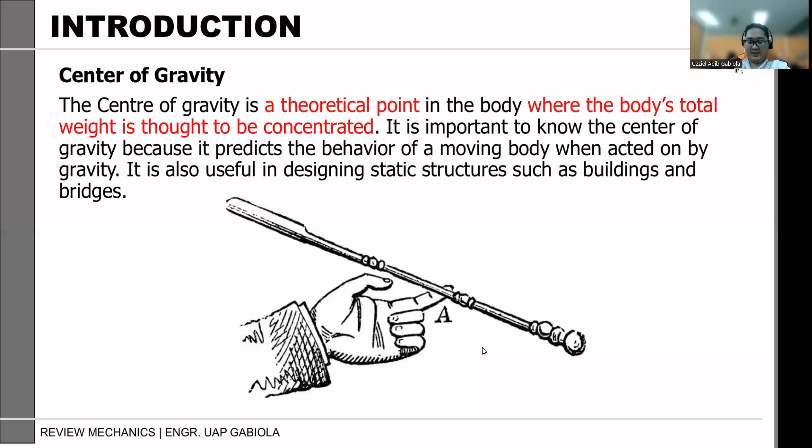Okay? For centroid of a composite area, if the plate is homogeneous and of uniform thickness, the centroid coincides with the center of gravity, ito yung sinasabi ko kanina. Kaya dito, para makuha yung bar x and bar y, pwedeng gamitin natin yung formula kanina. Balikan natin 'to. Ito yung sa first moment of area. Mapapansin ninyo equal siya sa integration of x dA. Saan ba natin nakita yan kanina? Nakita natin yan sa centroid.

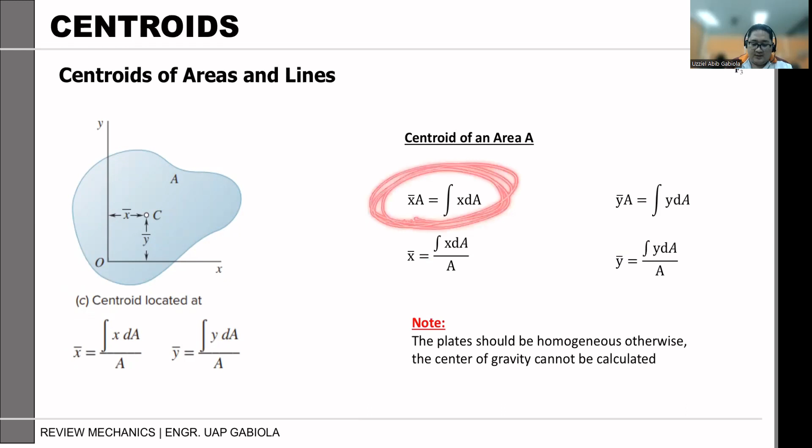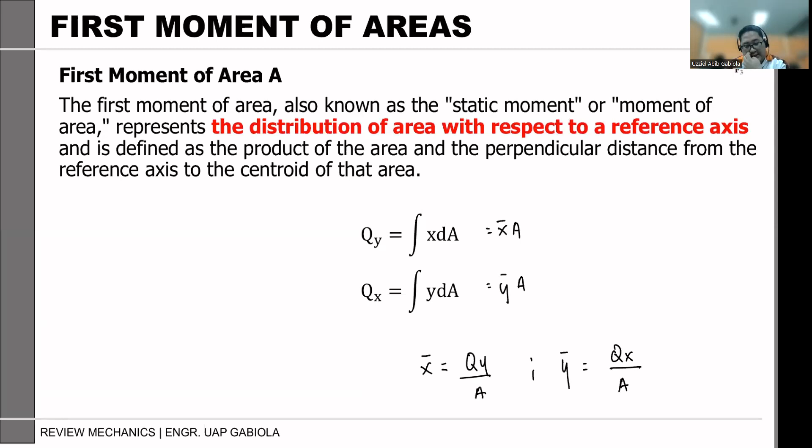Okay. So, pwede natin i-equate sa bar X A. And then ito ay equal sa bar Y A. So, kung gusto natin makuha yung bar X, pwede natin gamitin yung first moment. So, bar X is Q_Y over yung area natin, and bar Y is equal sa Q_X over yung total area natin. Kaya papasok dito yung derivation na nandito sa composite shape natin. Dito nanggaling yun.

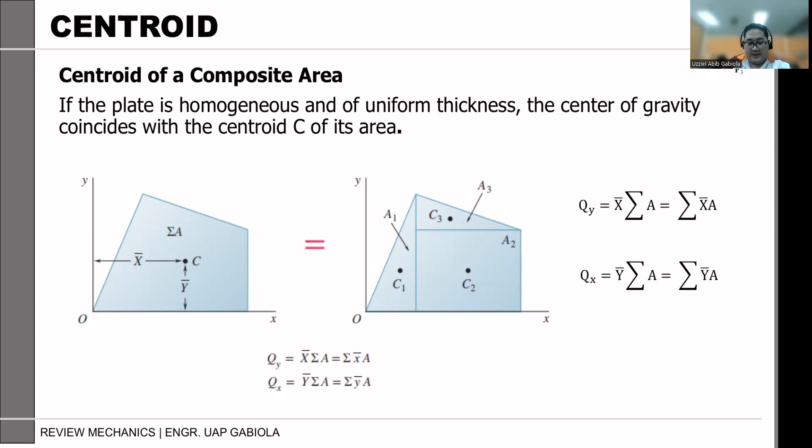Para makuha yung bar X, yung Q_Y i-divide lang natin sa summation ng area o yung total area natin, okay? Or dito, yung Q_X divide natin sa total area para makuha natin yung bar Y. Okay? Yan, sige. I think we can start with an example. Okay, so let's have an example.

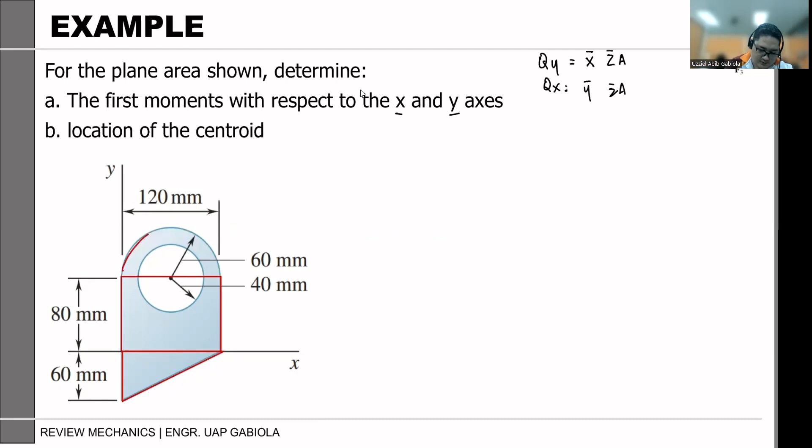And then circle, ma-minus tayo ng circle, ano? Kasi ito ay may butas siya, so kailangan i-minus natin 'tong shape na 'to, okey? So meron tayong ilan yun, 1, 2, 3, 4. 4 segments or 4 shapes na kailangang consider.

So ang gagawin natin, puwedeng i-tabulate na lang natin yung solution nito. Puwedeng halimbawa, start tayo dun sa triangle natin, okey, and then meron tayo nung rectangle, meron tayo nung semicircle, and then circle, okey? So since magka-calculate din naman tayo, i-table na natin ano.

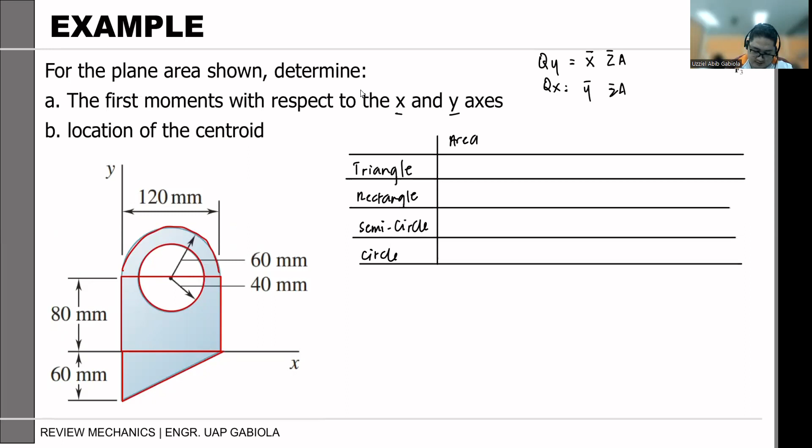Okey, so siguro ang kunin nating kasunod is yung area. Ano yung area ngayon nung mga shapes natin? So yung first one, yung area ng triangle, that is how much? 1/2, 120 times 60, base times height, so 120 times 60, correct?

Okay, next, yung rectangle, that is 80 times 120 minus - yung rectangle lang muna, mamaya na mag-minus, no? Kasi meron tayong area for circle, ano? So yung sa circle, doon na lang natin i-minus. Okay? So 80 times 120. And then, semicircle.

So area ng circle is pi r squared. So pag semicircle, kalahati nun, ano? So that is 1/2 pi. R natin will be - anong R? 60, ano? Okay, 60 squared. And then circle natin will be pi r natin ay

40 po, 40, okay? Pero we have to note na ito dapat ay negative kasi ima-minus natin siya dun sa total ng ating area, no. So puwedeng gawin natin i-total na natin 'to para meron tayo dito sa baba.

Ilan yung magiging total niyan? So pa-try natin sa calcu: 0.5(120 times 60) plus 80 times 120 plus 1/2 pi(60 squared) minus pi(40 squared). Okay, so ang total area is

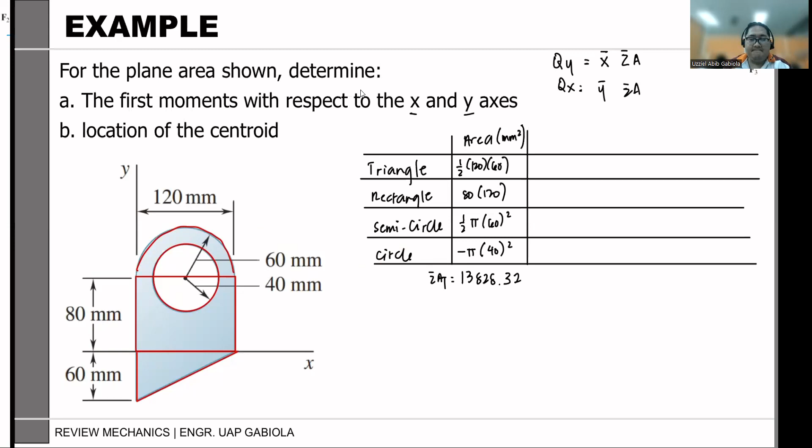Okay, next. So kailangan natin is use distance nung lahat ng shape natin with respect dun sa reference axis natin. So ang reference axis natin dito is itong y tsaka itong x axis natin. Ibig sabihin, kukunin natin yung centroid ng kada shape, halimbawa si triangle, si rectangle, si semicircle, and then kung ano yung mga distances ng mga centroid nila dun sa reference axis natin. So yun yung ibig sabihin ng bar x and bar y, no, kapag kinukuha natin dun sa para sa first moment of area, okay?

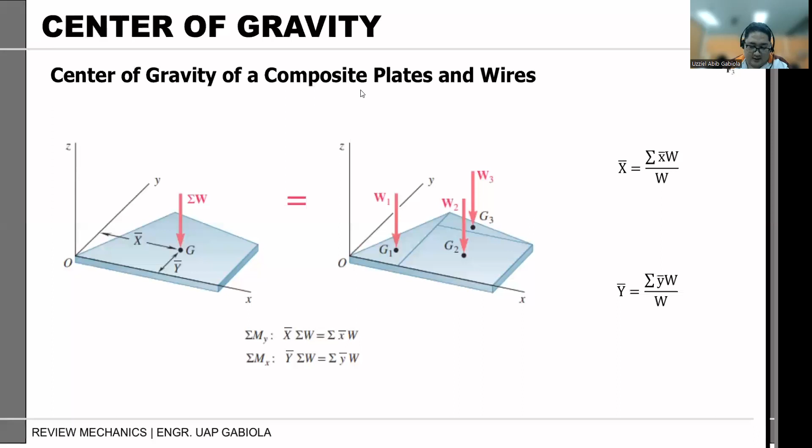So ano yung magiging bar x at bar y ni triangle muna? So si triangle, so tingnan natin sige yung table ano. Si triangle, okey, ito, okey. So ang value ng centroid ni triangle is h/3 for y ano. So since yung ating triangle is a right triangle, it is the same dapat nung bar x natin, h over 3 din.

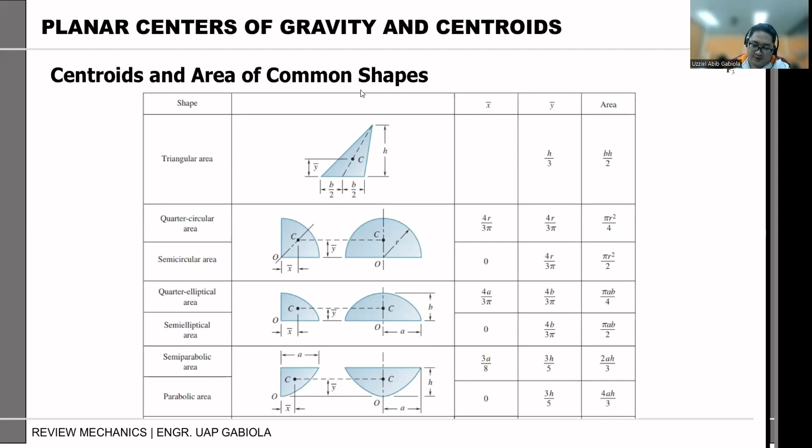Ito kasi naka-scalene siya, no? So kaya ganito yung nakalagay sa kanya, no? Wala siyang bar x. Pero kapag right triangle, b over 3 din yung bar x natin at bar y natin. Okay? So ibig sabihin kailangan natin nung 1/3 nung distances natin.

So ano ngayon yung magiging bar x natin? So ito yung CG niya. Ang bar x niya is yung distance niya papunta sa y. Yun yung bar x. Ito yung bar y niya. Okay? So ilan yung bar x? 1/3 of 120. 1/3 of 120. Okay, correct. So that is equals to 40. Okay?

Next, yung rectangle. Yung bar y, sige, yung bar y na muna. Bar y will be 1/3 of 60, 20. 60, 60 lang or negative 60. So kapag dito sa bar x at bar y, important yung signing natin, ano?

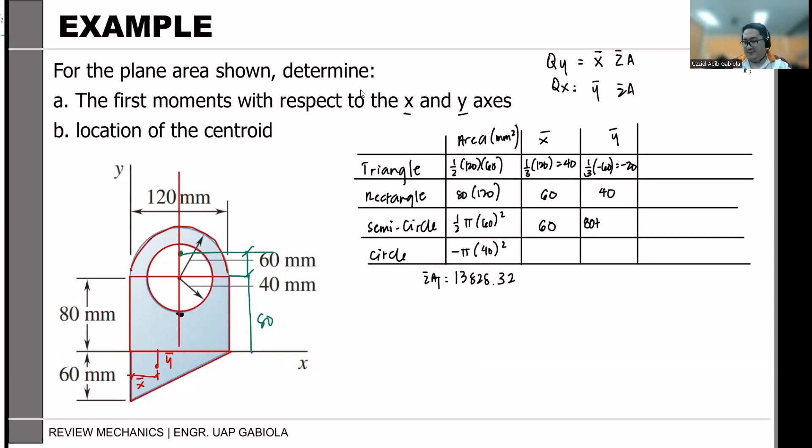Dito yon, somewhere dito, so titingnan natin ngayon. Kasi ang magiging distance natin is this distance. Ito yon, yung kanyang centroid. Tapos yung distance na to, which is 80. So dapat ang ano natin kay semicircle, kapag bar y is 80, plus kung ano man yung distance na yon. Pero yung kanyang bar x is 60 also. Katapat lang nung ating dito, no? Katapat lang siya. Okay?

So punta tayo doon sa semicircle natin. Itong isang to is para sa arc, ano? Don't be confused, ito ay para sa arc. Ang kailangan natin ay sa shape or area. So ito yung kailangan natin, ano? Semicircular area, so ito yon. So yung kanyang distance from the bottom nito, papunta doon, pag makikita nyo dito, that is 4r over 3 pi. Okay? O semicircle ito pala. 4r over 3 pi. Okay?

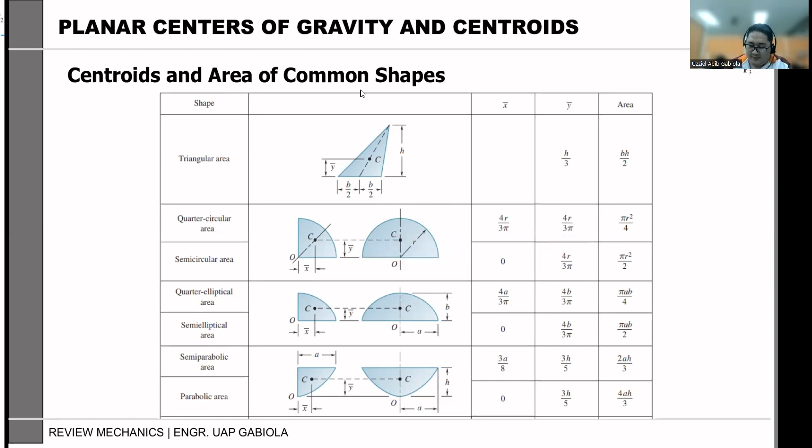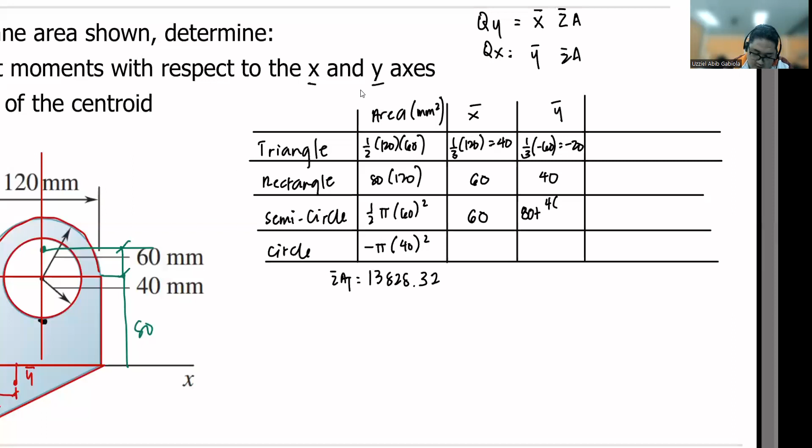So balik tayo dito sa table. 4r over 3 pi, so lalagay mo lang yun dito. That is 4 times yung radius ng semicircle natin, which is 60 over 3 pi. Okay? And then for our circle, ano ang centroid ng circle natin? What will be the bar x ng circle?

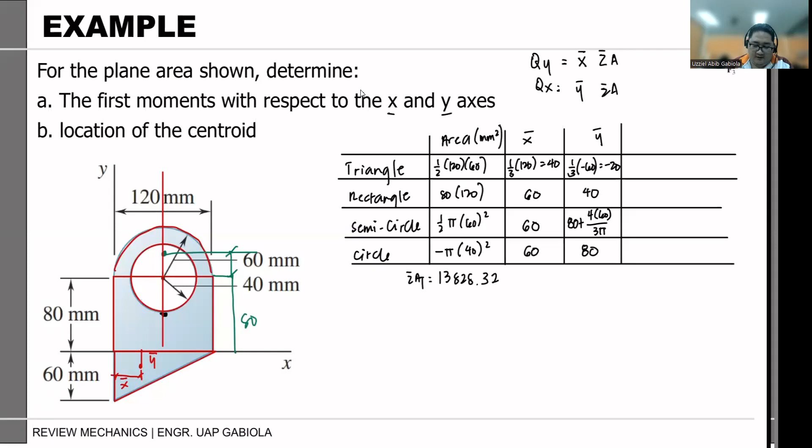Itong point na to, ibig sabihin. Anong coordinates itong point na to? Ang bar x niya, correct, 60 din. And then, ang kanyang bar y ay 80, yes correct. Okay, so yan yung bar x and bar y natin. Kasunod, after identifying yung mga values na yan, pwede na natin kunin yung next set ng table natin.

Which is yung bar x times a. Ito na yun. Bar x times a, so ito multiply mo lang, tapos yung ating bar y times a. Tapos, isasum lang natin. So sige, i-calculate ko na lang, pa-verify na lang ako sa value.

1/2, 120 times 60 times 40, this is 144 times 10 to the 3. 80 times 120 times 60, this is 576 times 10 to the 3. 0.5 pi 60 squared times 60, this is 108, 108 times 10 to the 3 pi, tapos negative pi 40 squared times 60, that is negative 96 times 10 to the 3 pi.

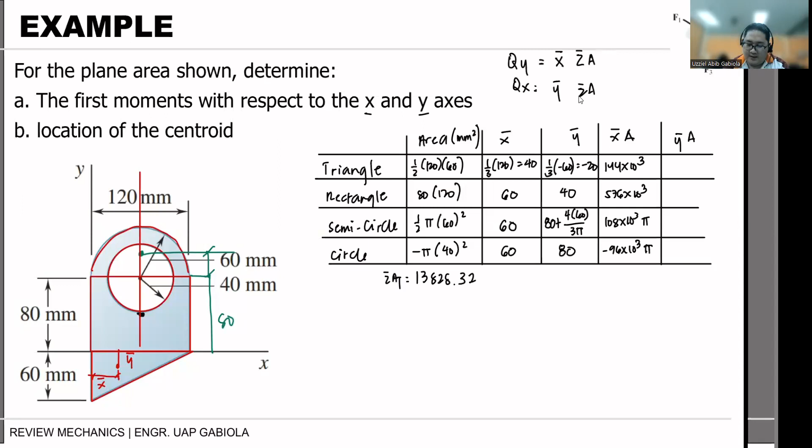For y, multiply lang din times negative 20, so negative 72 times 10 to the 3. Next, 80 times 120 times 40, we have 384 times 10 to the 3. So 0.5 pi 60 squared times 80 plus 4 times 60 over 3 pi, so this is 596.4 times 10 to the 3. And then negative pi 40 squared times 80, we have negative 128 times 10 to the 3 pi.

So, after getting yung mga values na yan, isasum lang natin siya. Pag kinuha natin yung sum niyan, itong una, summation of x bar a, so ito yung ating summation of bar y a. Ito, actually, is yung qy natin. Ito yung ating qx. Yan yung kailangan natin dun sa letter A.

So, 144 times 10 to the 3, plus 576 times 10 to the 3, plus 108 times 10 to the 3 pi, minus 96,000 pi. So this is 757.7 times 10 to the 3. This is cube.

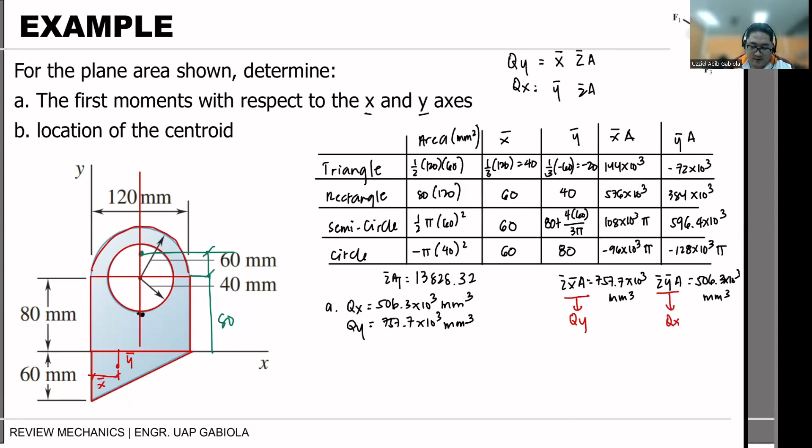Next, location ng centroid natin. So for the centroid, madali na ngayon. Para makuha sa centroid, yung bar x natin, gagawin lang natin qy over yung total area natin. And then yung ating bar y is qx over yung total area natin. So this is 757.7 times 10 cube all over. Yung A na tinutukoy dito is yung total area natin, which is yung 13,000.

828.32 natin. And then we have 506.3 times 10 to the 3. And then this is 13828.32. Kung cube to, this is squared, matitira ay na lang. So, ilan yung magiging value? 757.7 times 10 to the 3 all over 13828.32.

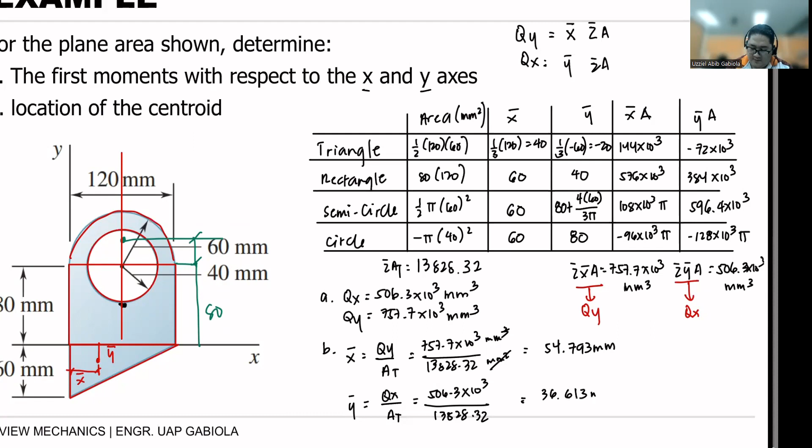We have 54.793 mm. And ang y natin, 506.3 times 10 to the 3 divided by 13828.32. That is 36.61 or 36.613 mm. Okay, so that will be our centroid.

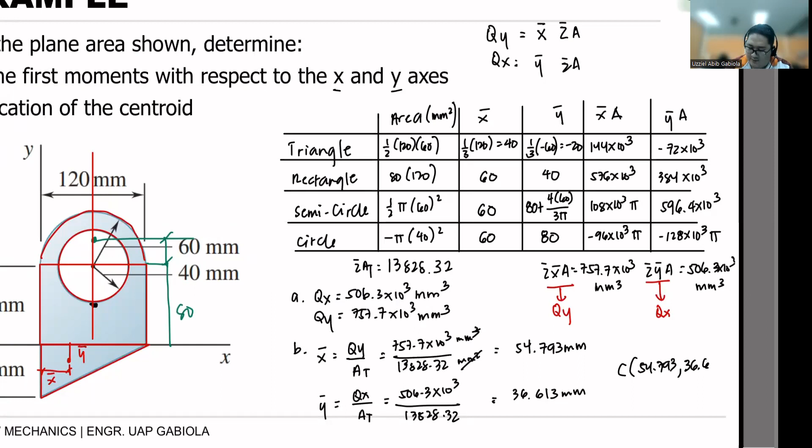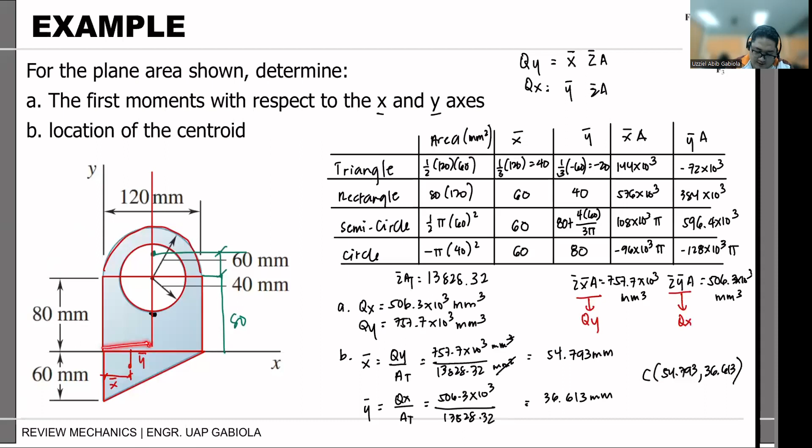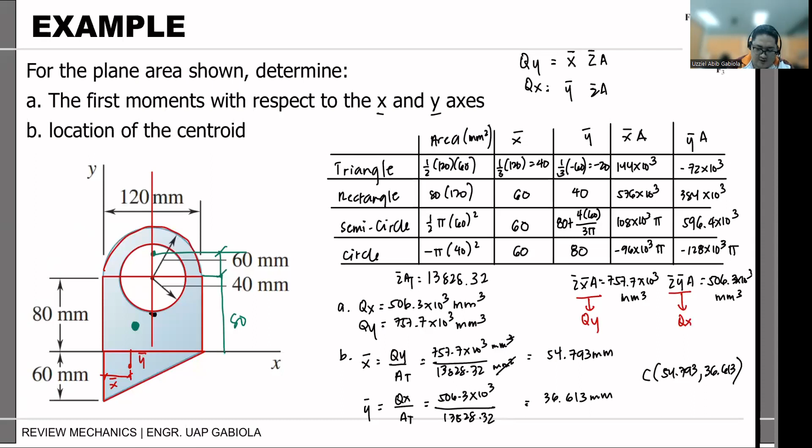54.793, 36.613. Ulitin natin. C, 54.793, 36.613. So pag ipa-plot natin, yung x natin is 54, yung kalahati niya is 60, so somewhere dito. And then yung 36, ang 40 ang kalahati, so dito somewhere. So nandito yung kanyang position ng CG niya. Okay, yun yung C natin, somewhere dun sa location na yan. So, yan po yung procedure kung paano hanapin yung first moment of area and centroid nung given shape natin.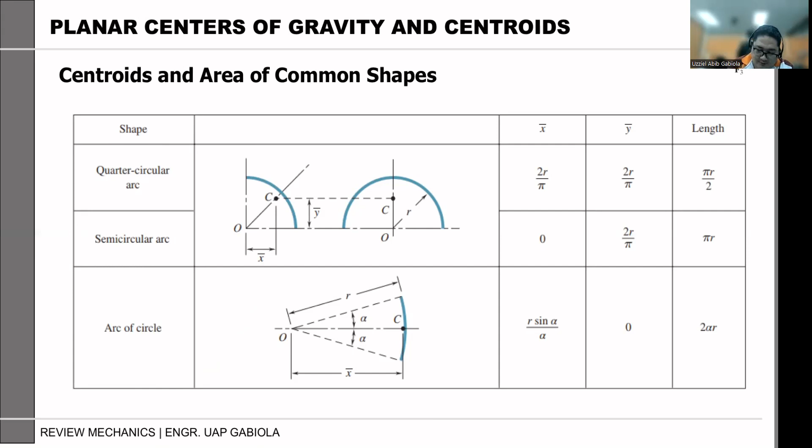So this is the line of its centroid, and this is the position of our weight, with a value of 2r over pi. Correct? 2r over pi - double check, yes.

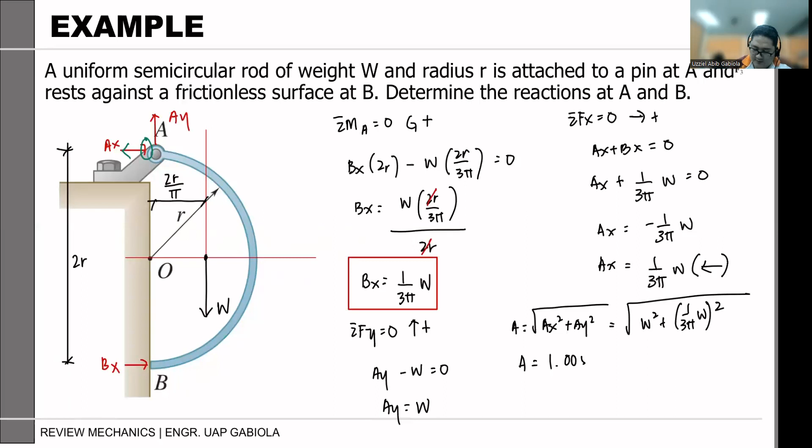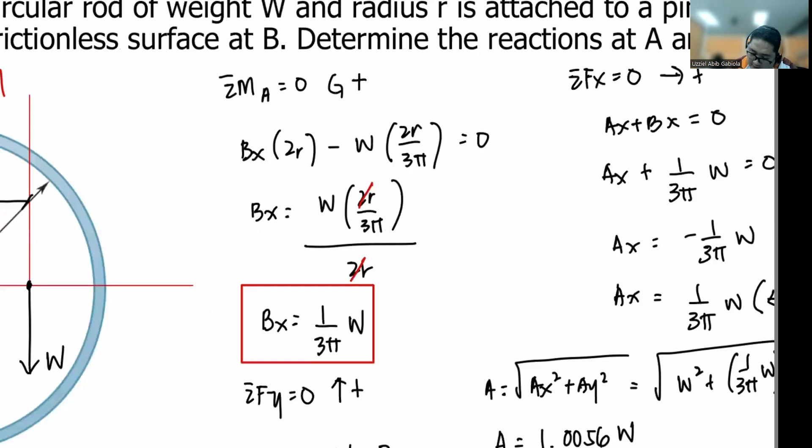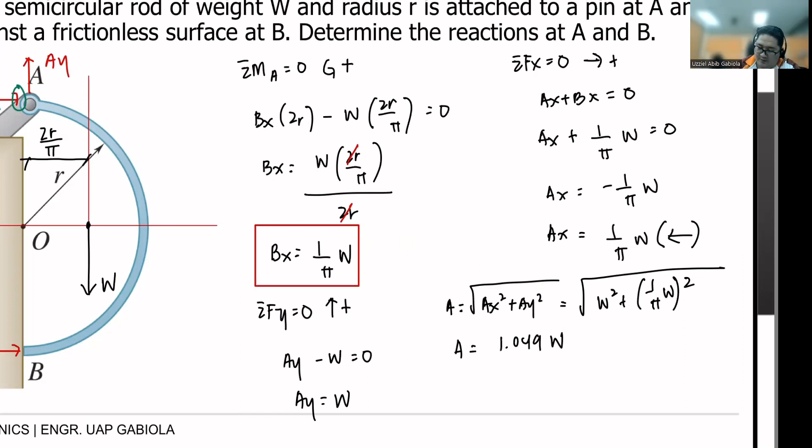yung W lalabas lang siya. So, 1 plus 1 over 3 pi squared. Tapos i-square root natin yung value nun. That is 1.0056 W, yung value ng A natin. Tama ba? Wait lang, may mali pala ako. Bakit ako nagka-3 dito? Wala itong 3. 1 over pi lang. So, dapat yun ay 1 plus 1 over pi squared. So, 1.049 W. Okay?

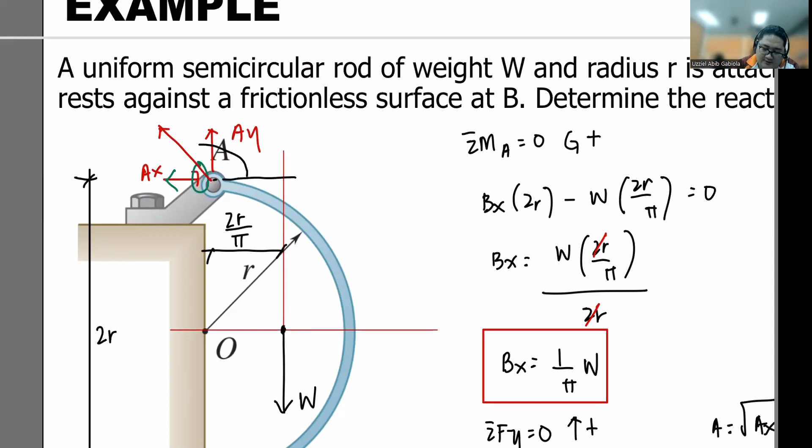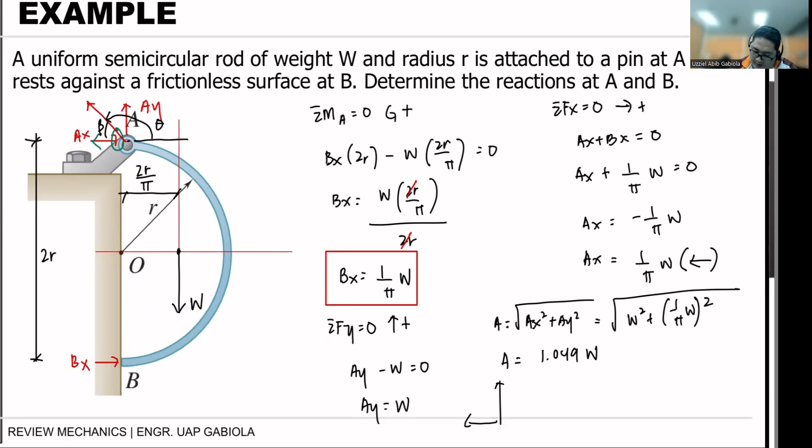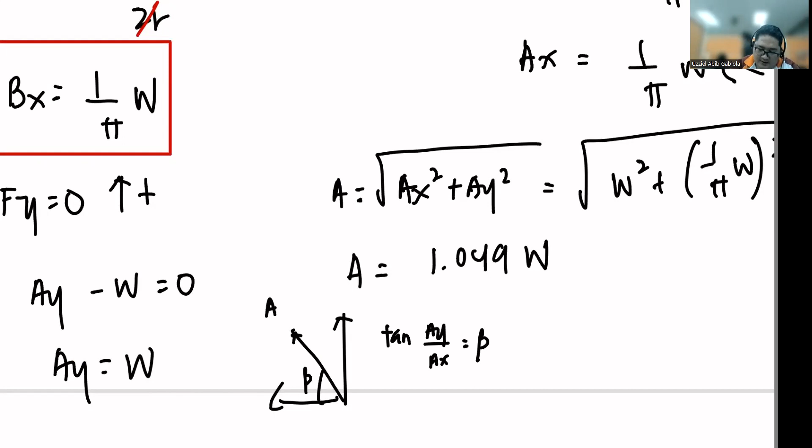Ito yung position natin ng reaction natin. Yung A natin is ito. So, kailangan makuha natin kung ilang degree siya mula dito sa reference axis natin. Okay? So, para makuha yon, kunin natin yung beta. Ito yung A na na-calculate natin. So, that is tangent of Ay over Ax is equals dun sa beta. Mali pala, tangent inverse. Okay? So, beta is equals to yung Ay natin, that is W,

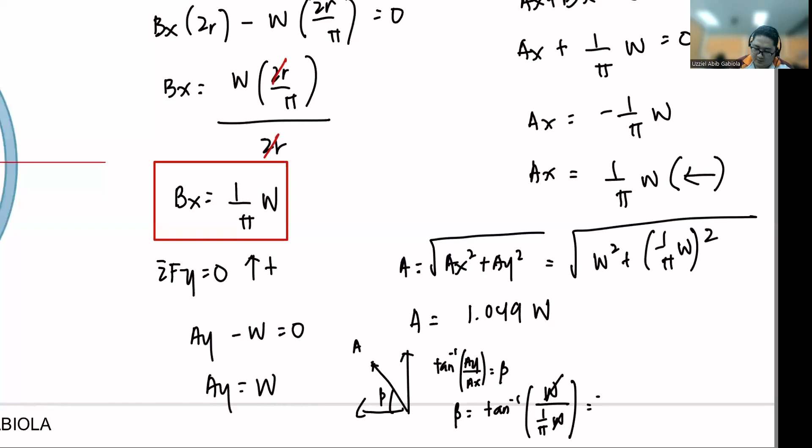so tangent inverse of W over 1 over pi W. Okay? So, cancel yung W. So, tangent inverse ng pi na lang yan. That is 72.343 degrees. Pero hindi natin kailangan yung beta. Ang kailangan natin is itong theta. So, theta is equals to 180 minus beta. That is 107.66 degrees. So, ang pinaka-answer natin for A is 1.049 W angle of 107.66 degrees.

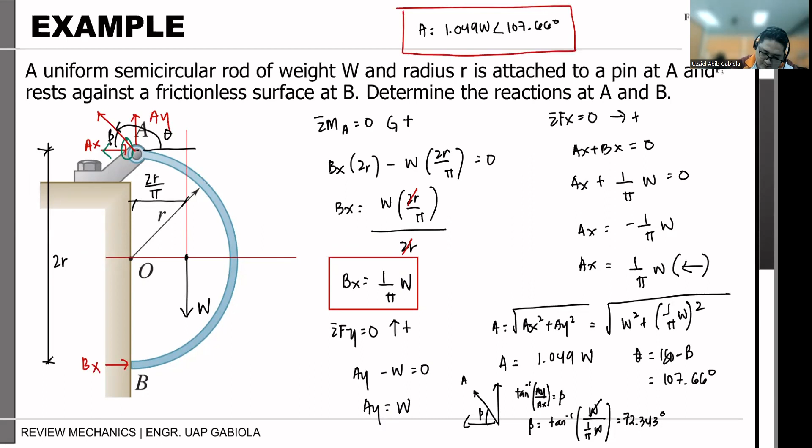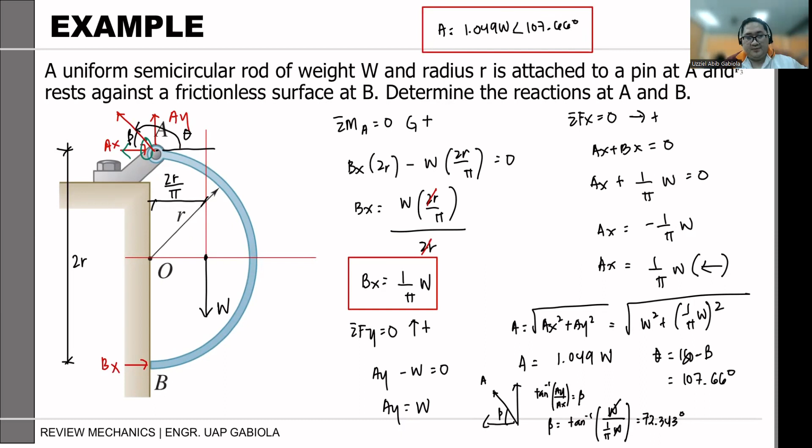Okay? So, using yung concept ng center of gravity, nagkameron tayo ng value for the reaction natin in terms of weight. So, whatever yung ibigay na weight sa problem, i-multiply mo lang doon, then you will have the value of the reaction for A and B. Okay? Question, guys?

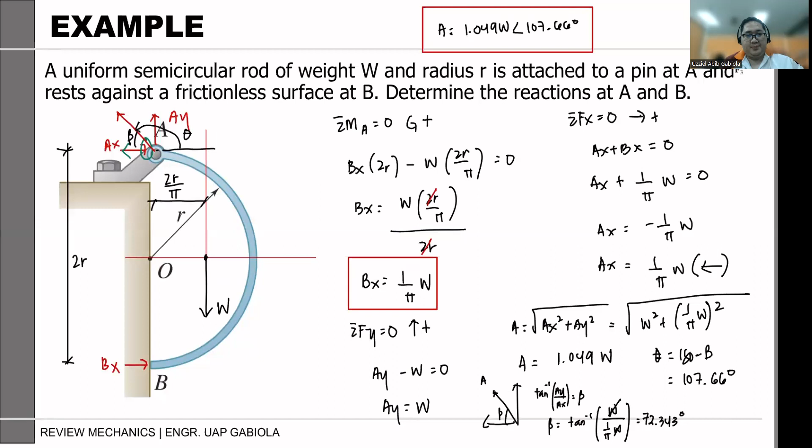Okay, so this ends yung first part natin for the semifinals. I will post a problem set to practice on solving for the centroid or center of gravity ng mga section natin. So please wait na lang sa NEO LMS ng announcement nung mismong problem set natin. Okay, so alright.